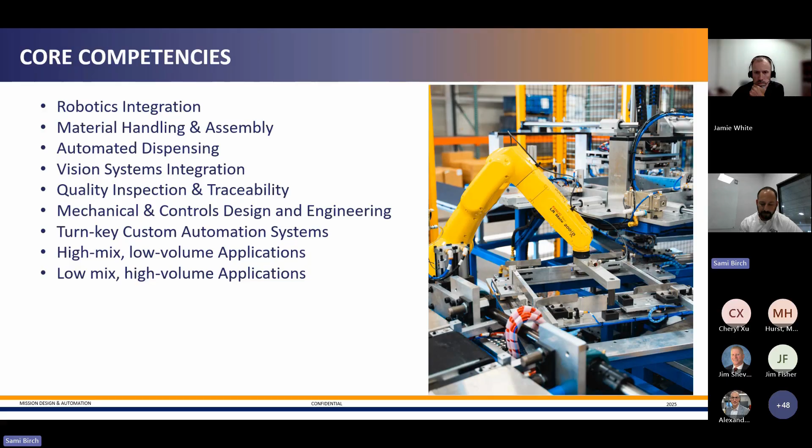Where to begin? I'm going to jump into some good spots to start.

If you know you need to improve but you're not sure where, maybe you don't have an engineer on your team experienced with automation equipment. Sometimes your main focus is manufacturing and parts out the door, and building your own engineering team may not make sense for your organization. That's where we come in with our engineering team. We typically consult for free at the beginning—we'll have a few phone calls, understand your problem statement, and pull in engineers with 10, 20 years of experience to kick around ideas and understand your process. That gets us a good jump start on where the dollars may be most valuable for you.

You're not sure what's even available or possible with automation. The question earlier was standalone or fully automated—there's a very large range of solutions, and picking the right tool is important. Without someone to Sherpa or mentor you through that process, you might get sold more than you need, or not enough. For example, if you're looking for MES and data roll-up to your organization, you need to set up your PLCs and control structure on that localized machine correctly to handle the tags and information you need. So it's really talking through that process, and we can show you the available solutions across that range.

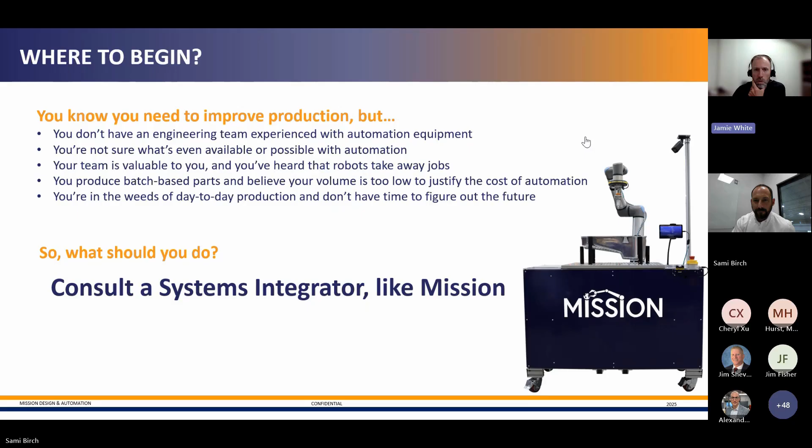Want to touch on how integrators help with defense manufacturing. Try to touch on some of this along the way.

Essentially, what is a systems integrator? Mission Design is a team of applications design, controls engineers, builders, electricians. It's a full team that handles turnkey equipment production. We look for the right tools in the industry and bring those together to create a system for you. Much like an architect turns ideas into buildings, we turn processes into high-performing stations and machines.

In the background here, you see some milling machines, a FANUC robot in the system, and then an end-of-arm tool handling processes. This product did go into defense. We were vision picking with that robot, then loading into the CNCs, and then packing that part out. What you see there is different pieces coming together to make a full turnkey system, and that's what we do.

We engineer those different parts - building the bridges from the end-of-arm tool, selecting the right robot, selecting the right mills, selecting the right vision system - to allow the customer to come in with a fork truck, set down a pallet of goods, go pick up a full pallet of processed goods, and move on. So this handles that whole process.

So we'd partner with your team, understand what you're looking for, what your goals are for the process or performance, walk through understanding the opportunities for you and how we make those fit with any pre-qualified work instructions or quality requirements you may have. Essentially, we step through and generate a concept at the beginning. We'll show you some different ideas, talk about if that's what you're looking for, or if we think it will work and achieve what you need. And then we work with partners in different areas to get the right tools and components in place.

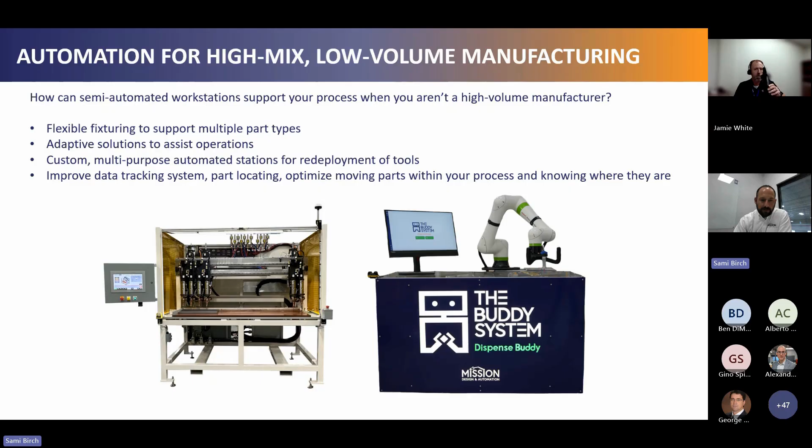How can semi-automated workstations support your process? At low volume, it's really about building in flexibility to support multiple part types with adaptive solutions. This dispense buddy we're showing here is a way to lower that skills gap or skills need for programming, and it makes it very easy to deploy and adjust for redeploying those tools. You can often add data tracking into the process as well.

I'm going to show a video here. What you're going to see is an Okuma CNC, and the goal of this was lights-out processing. You'll see a carousel on the front end that feeds into a lathe process. Following that, we do some metrology, pick the correct size bearing race, and press that bearing race to a force and distance to ensure it's properly installed. Then we go to some optical micrometers to read the overall diameter, make sure the bearing race didn't deform the part more than necessary, and check the thread pitch. From there, it goes into a good or no-good location and a carousel on the back end. So I'll let this play, and we'll go from there.

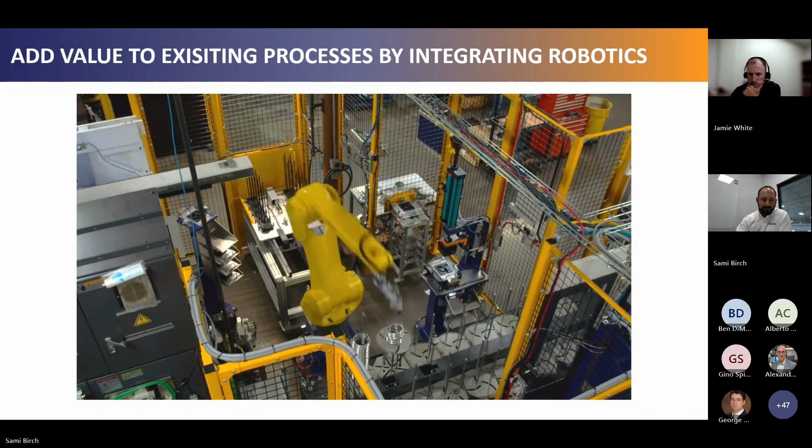All right, I'm going to keep moving because I want to get to questions, but that one is essentially doing value add after a machining process. The company was using air gauges prior to that and had no data feedback. So now we're doing metrology. We can do feedback on the metrology and then closed loop to that CNC if we need to adjust the machining process as tool wear occurs.

I'm going to run through this case study. This is a smaller system. This customer was an aerospace customer doing MRO, maintenance and repair on their systems. They had a number of different parts, typically smaller batches where they need to apply paste, and a few different components. So we worked through that process with them, developed a few different nest fixtures that you can see here. We put a prox ID, or proximity ID, another way might be a binary ID, to identify what nest was there. That would then trigger the right program so the operator didn't have to worry about what program was running. And then we dispense onto that part.

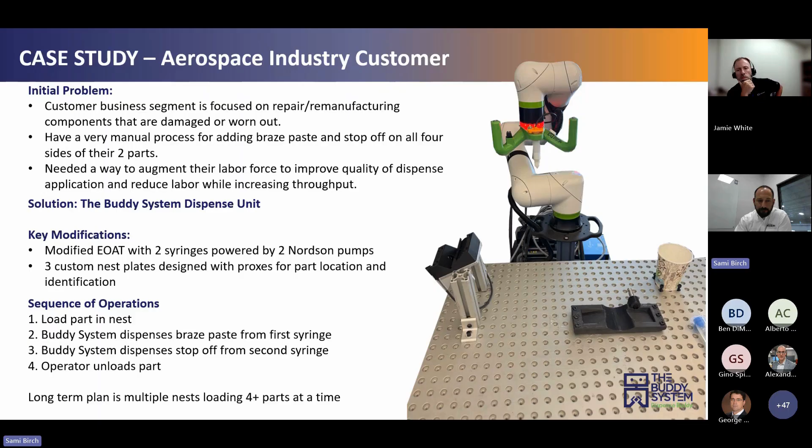So what they got out of this was higher quality dispense, lower failure rates, traceability, better usage of their material, so not over or underfill, and very small training so they can deploy this as they ramp up and scale, because MRO continues to grow in their business as they try to maintain their fleet over so many years. And then refocusing some of their personnel to other value add tasks within that MRO space. There's a lot of uniqueness that can come in that operators are very good at handling. So this takes that maybe 80-20 approach where a lot of the volume can be run through here, but the unique cases are still handled by the operator.

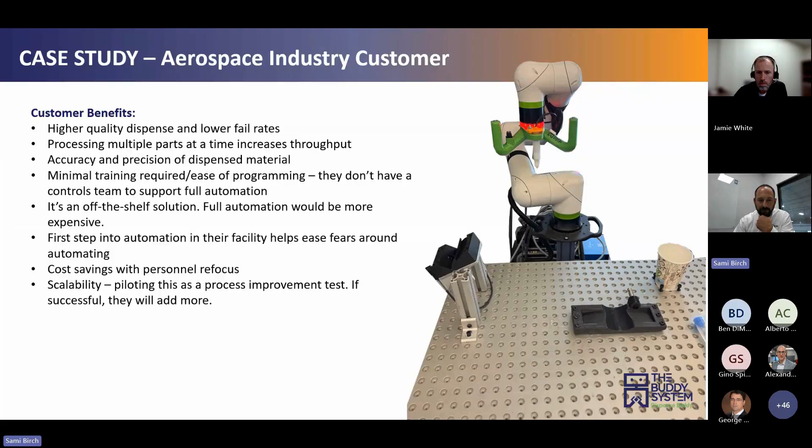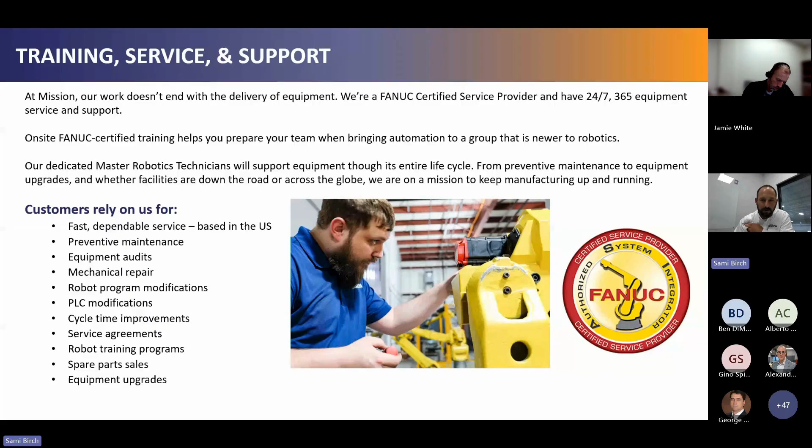I mentioned a service team. One of the things that's important is to keep your equipment and your automation running. We have a team that does that. I've talked about a certified service provider for FANUC, but we also provide training, equipment audits, repair, modifications, and cycle time improvements as well. We understand that you owning a piece of equipment doesn't stop when we leave. You still own it and you still need to make good parts. So we're here to support that process with 24/7 support.

How to get started. We've talked a little bit about this, but talk with us, ask questions. We can come in and evaluate those opportunities. Often we recommend, if you haven't done it before, let's find some small base hits or small wins. A small quality check, something that reduces scrap or gives you data on how to better adjust your process. Workbenches or assist stations that make operators' jobs easier. Sometimes that's lift assist for heavy components and ergonomics, and automatic CNC tending, those kind of things. So don't try to do everything at one time. We can set it up so you build the scale.

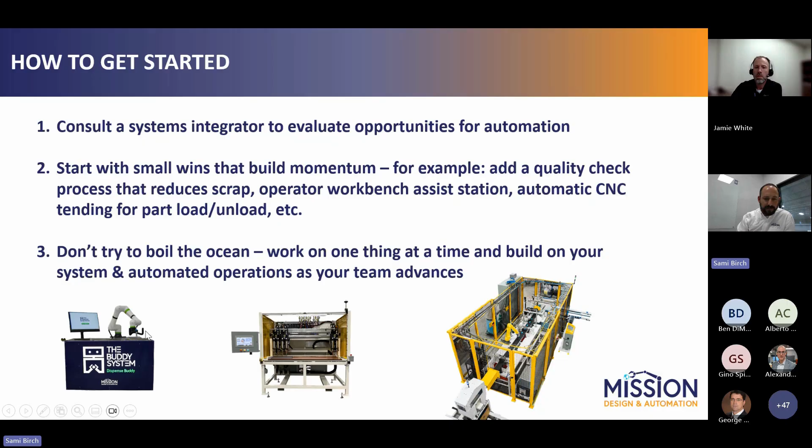Jamie, I kind of hit on these different size systems earlier for automation. Appreciate the time, and you can get in touch with me here. But I wanted to leave some time yet for questions. So if we want to jump into those, I think this is the last one.